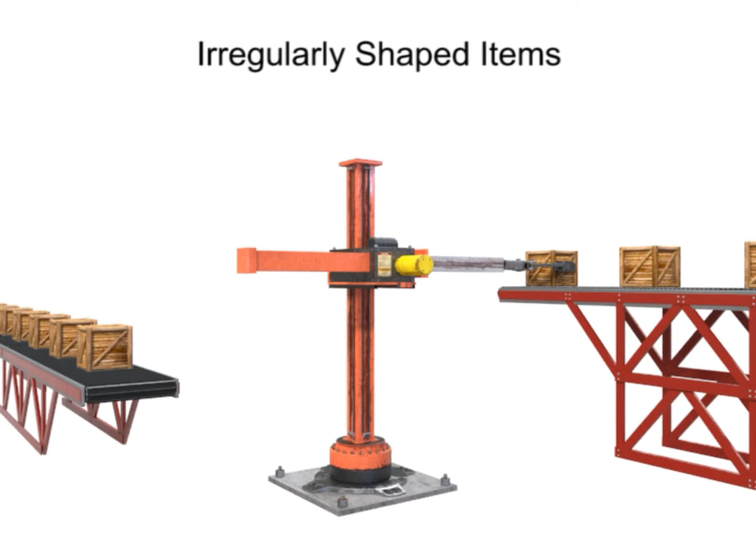There are various ways of lifting irregularly shaped items. While the most common lifting devices in robotic arms are flat-surfaced grippers, these types of devices are most efficient with flat-surfaced workpieces and are not nearly as efficient with round, cylindrical, or other irregularly shaped items.

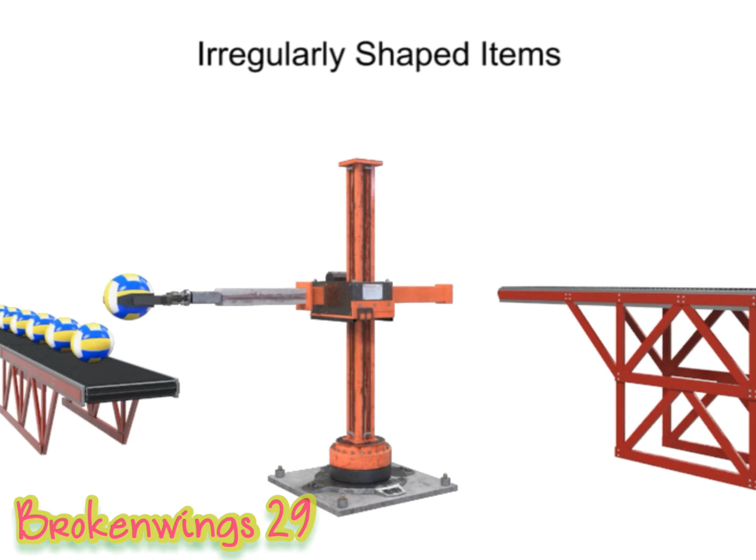When used inappropriately, flat-surfaced grippers can either crush the workpiece or drop a workpiece due to inefficient grip, especially in high-speed operations.

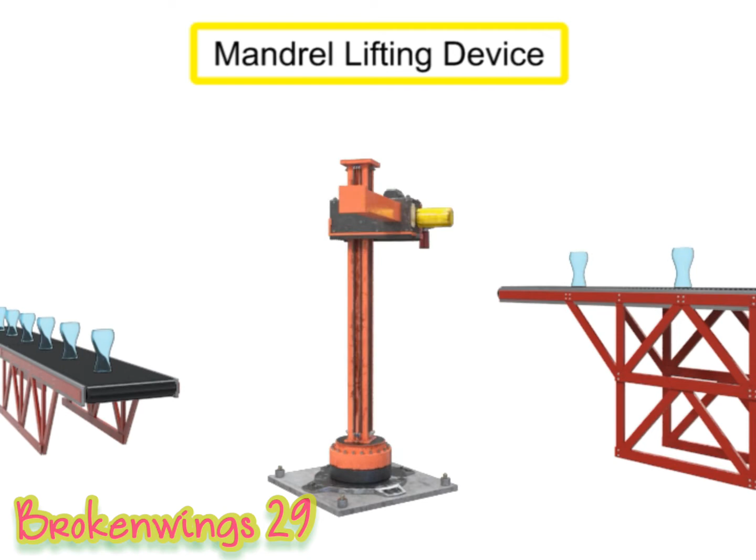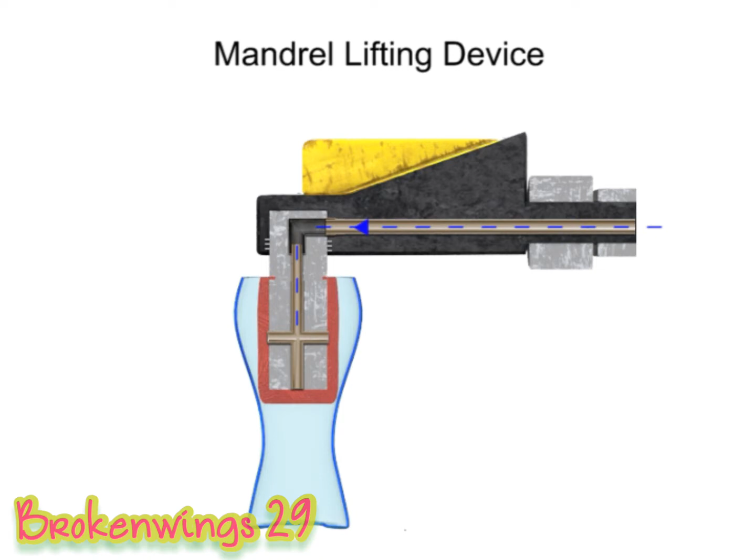A pneumatic mandrel lifting device is used to lift objects that are hollow. The gripping action of a mandrel lift is applied to the interior of the workpiece. Low-pressure air is channeled to a chamber behind a diaphragm. The diaphragm then expands until it is firmly gripping the interior of the workpiece. To free the workpiece, the air is released from the diaphragm, which then deflates, allowing the robot to relinquish the item.

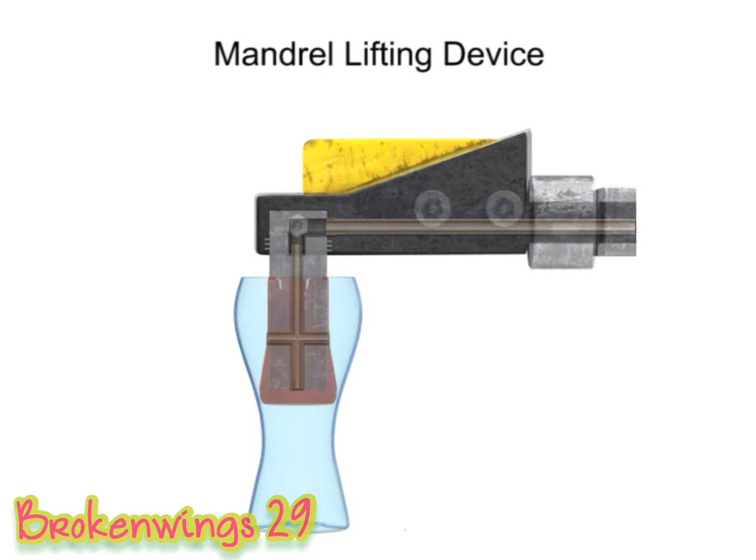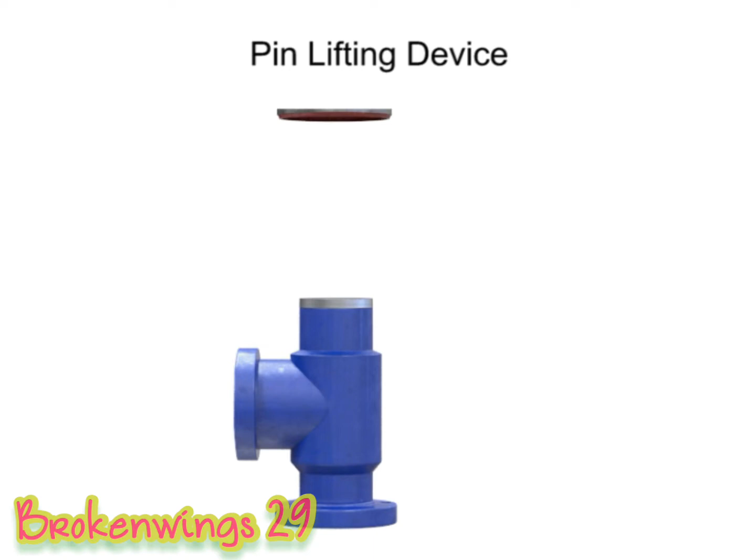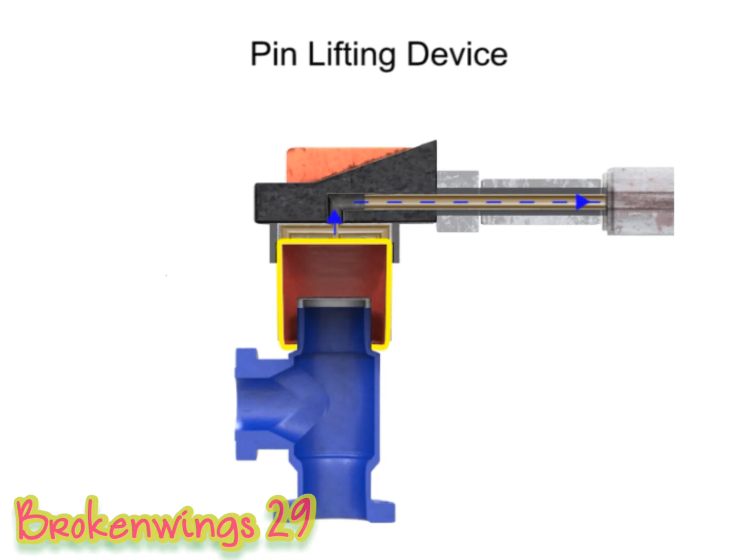Pneumatic pin lifting devices work similarly to mandrel lifting devices. The main difference is the location of the gripping action of the tool. With a pin lifting device, the gripping action occurs on the outside of the part. As the tool surrounds the workpiece, low-pressure compressed air is used to expand the diaphragm, ensuring a snug grip on the exterior of the workpiece. To free the workpiece, the pressurized air is released, which deflates the diaphragm and allows the workpiece to drop freely.

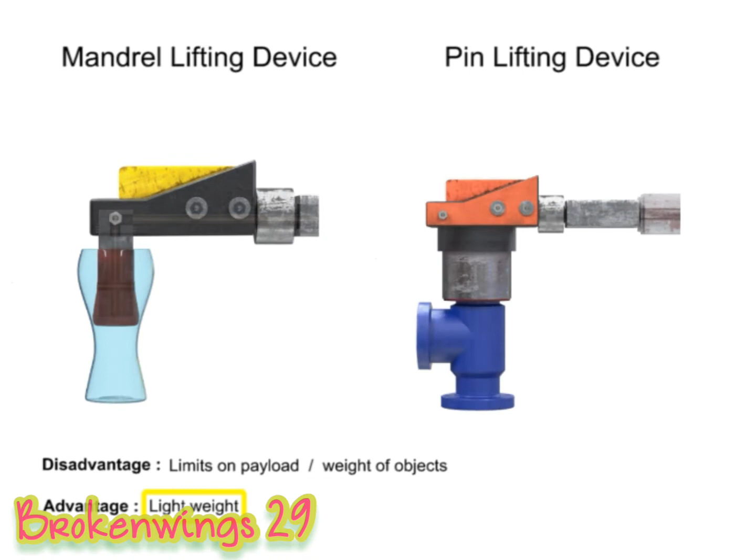The single disadvantage of these pneumatic lifting devices are the limits on the payload or weight which they can lift. However, these flexible pneumatic devices have many advantages, including their light weight, their ability to grip parts without damaging surfaces, and their ability to grip parts with irregular shapes.

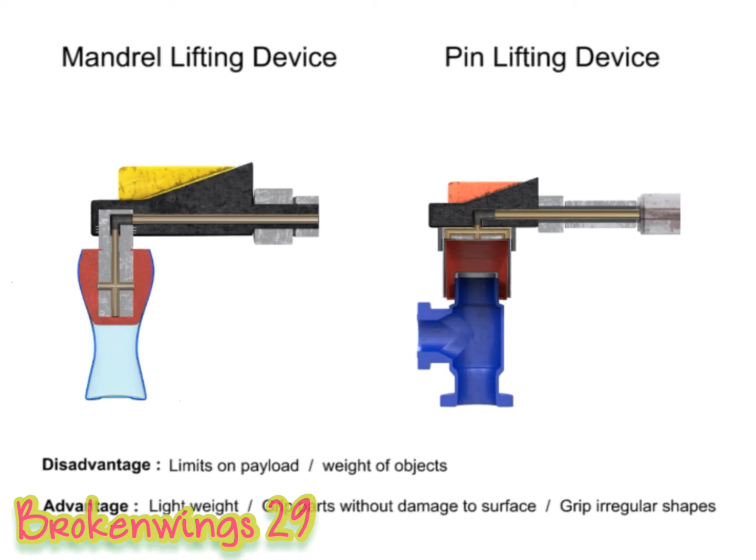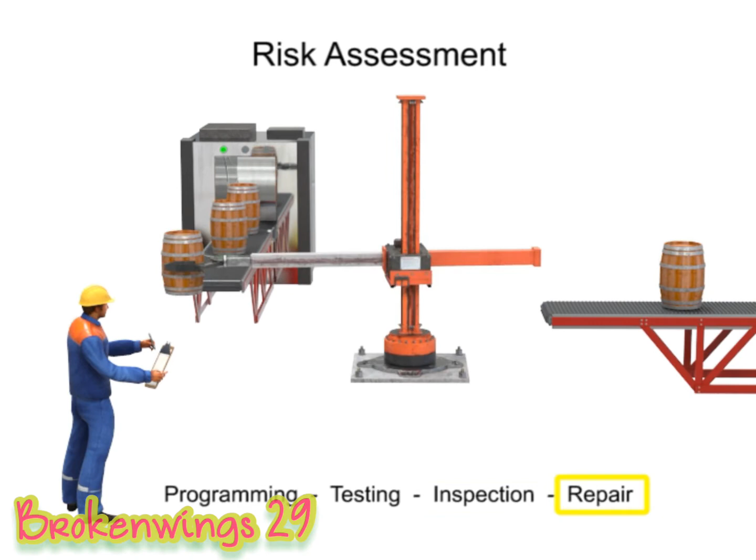The first step in the design process for any robot is a risk assessment of its potential hazards. Studies have shown that most injuries occur not during normal operation, but during times when human interaction is most prevalent: programming, testing, inspection, and repair. By system design, robots rarely need human interaction during normal use and operation, but when programming, testing, inspection, or repair is required, humans are more likely to be in the robot's work area or work envelope.

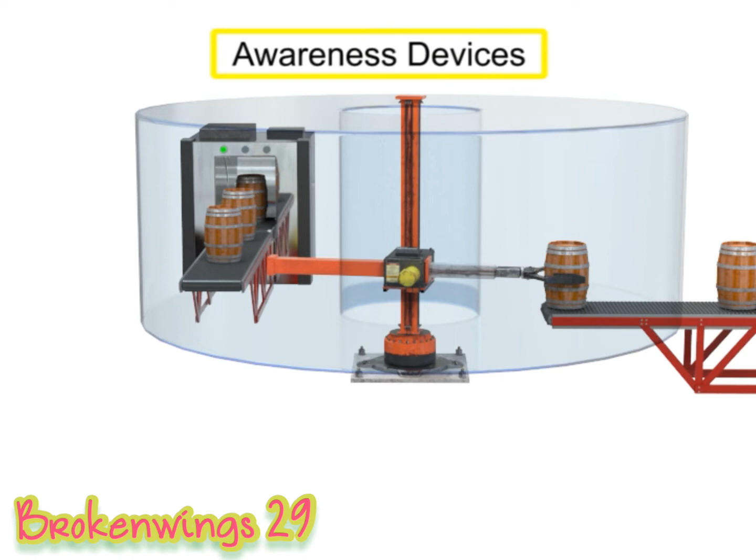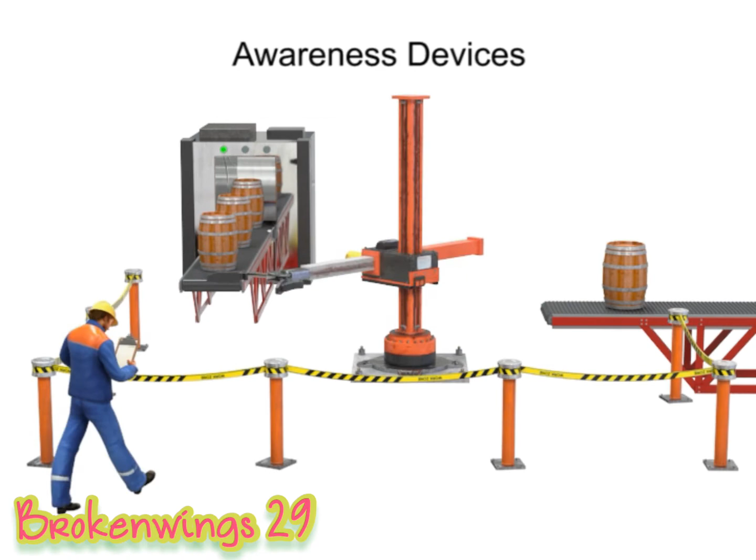Unauthorized access to the robot's work envelope can be hazardous to personnel. Several methods can be used to protect the work envelope. The simplest are known as awareness devices. These devices are only intended to define the work envelope and make personnel aware of the hazards. They do not prevent access and usually consist of small fences or roped-off areas.

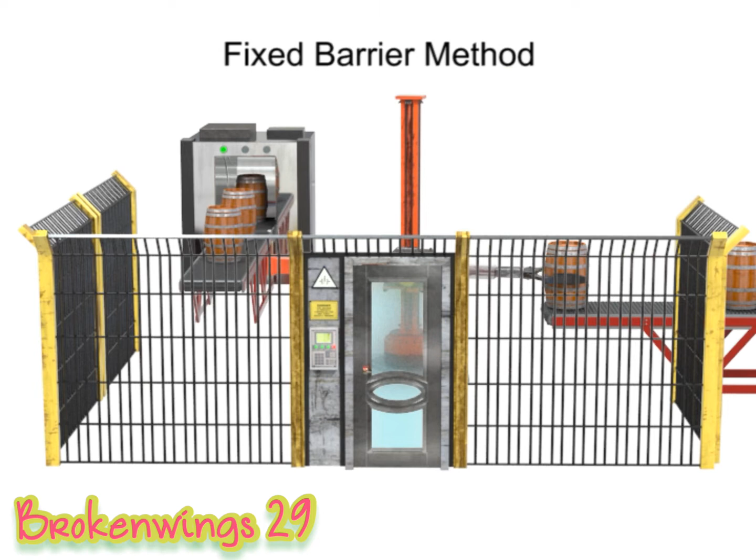Guarding methods are used to prevent unauthorized access to the work envelope. The simplest is known as the fixed barrier method, such as a fence or wall. The physical barrier is put around the work area and is configured in such a way that prevents access through, over, or around without a special key or access code.

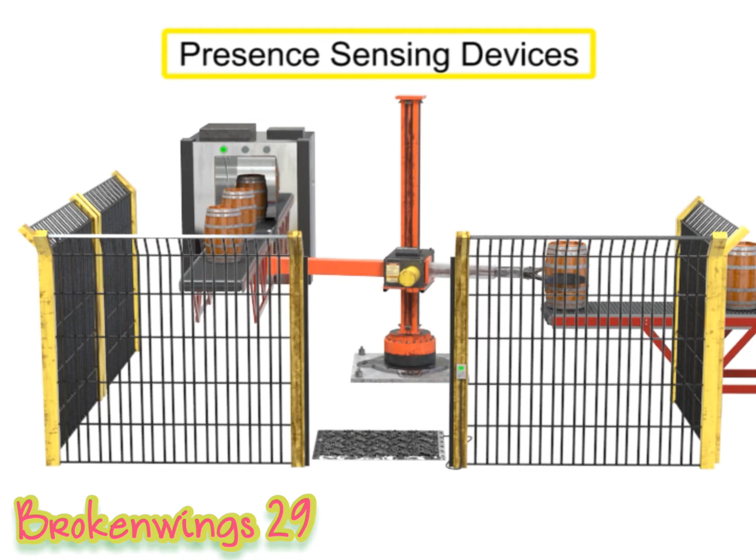Another method of protecting the robot's work envelope employs the use of presence-sensing devices. These devices detect the entry of a person into a hazardous area and slow or stop the robot. Pressure mats are typically installed just outside the robot's work envelope. When a person steps on the mat, a signal is sent to the robot to stop or slow work.

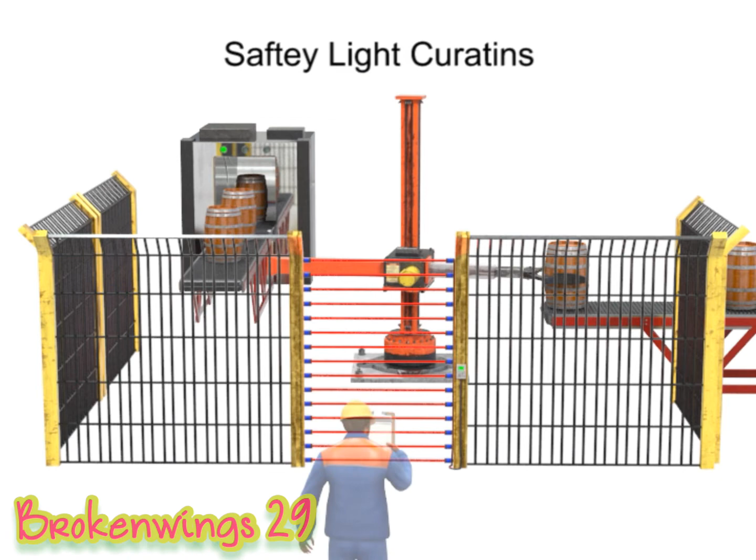Safety light curtains are another type of presence sensing device. When a person enters the work envelope, the light beam is interrupted, which sends a signal to the robot. For certain work scenarios, sudden stops could cause the work to become uncontained. Objects may continue to move even after the robot stops.

In these cases, emergency braking of the robot is used in lieu of completely stopping. With emergency braking, the robot slows down work and does not stop suddenly.

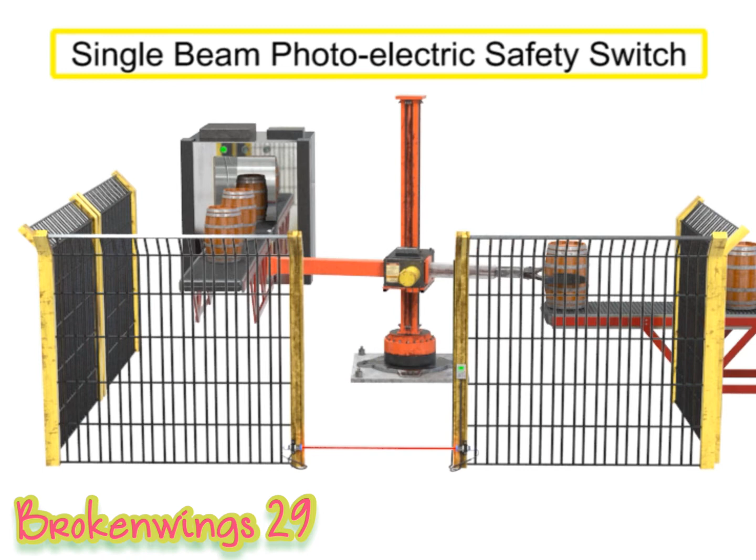Another type of light barrier is called a single-beam photoelectric safety switch. These work in the same way as a light curtain but have only one beam of light, similar to an automatic garage door sensor. Single beams can be useful for preventing unplanned or surprise access to the work area. However, depending on their placement, single beam lights may not stop a determined person from gaining unauthorized access and potentially causing damage to the robot or personnel.

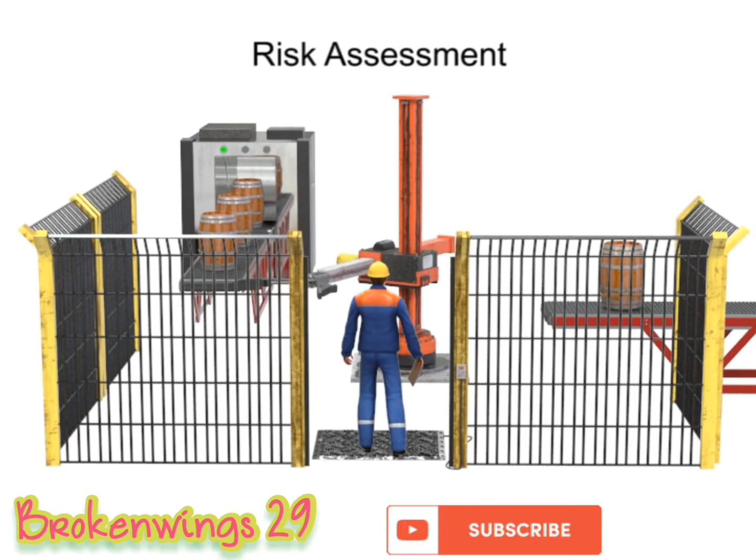The design and location of control panels are also fundamental to a safe robotic design. The control panel should always be located outside of the work envelope but within sight of the robot. Emergency stops should be located in all zones where needed and should be a large part of emergency personnel training. If the proper safety measures are used, robots can be a highly efficient, safe way to accomplish work.

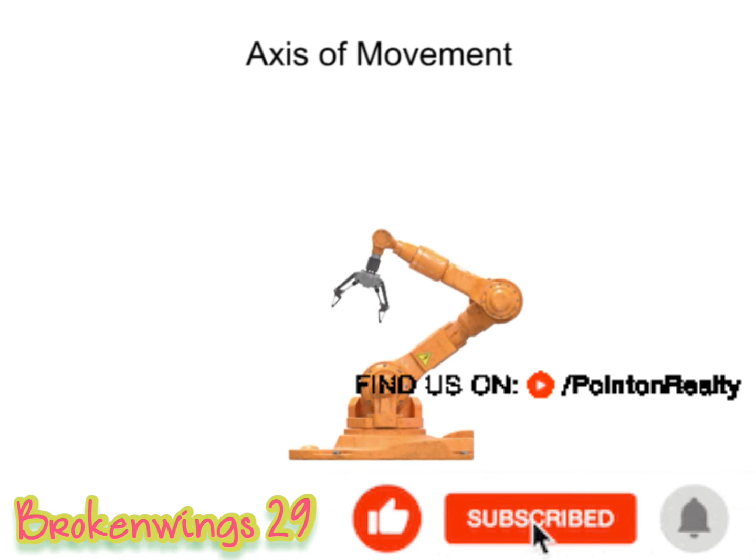Robots come in all different shapes and sizes, but are frequently classed by their degrees of freedom. Each direction of movement on the robot is considered an axis of movement. This robot rotates at the waist, bends forward and back at the shoulder, and moves vertically at the elbow.

Each single movement axis is equal to 1 degree of freedom. This particular robot is equal to 6 degrees of freedom. It moves along one axis for each of the waist, shoulder, and elbow joints and along 3 axes at the wrist using pitch, roll, and yaw.

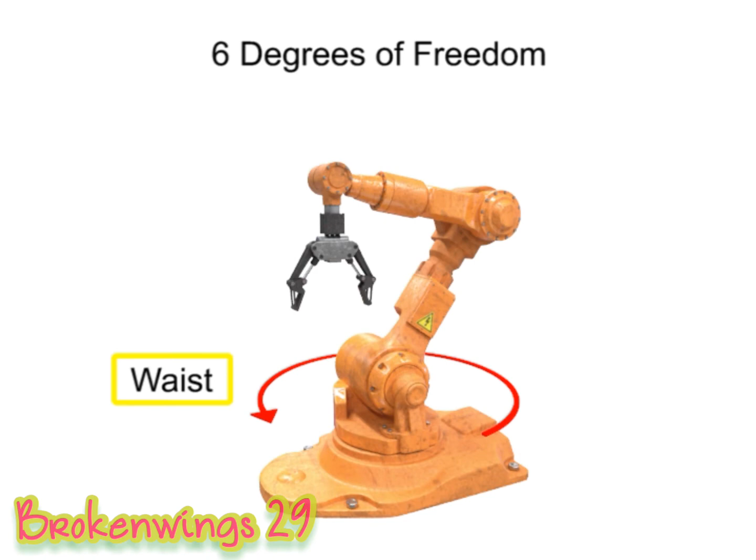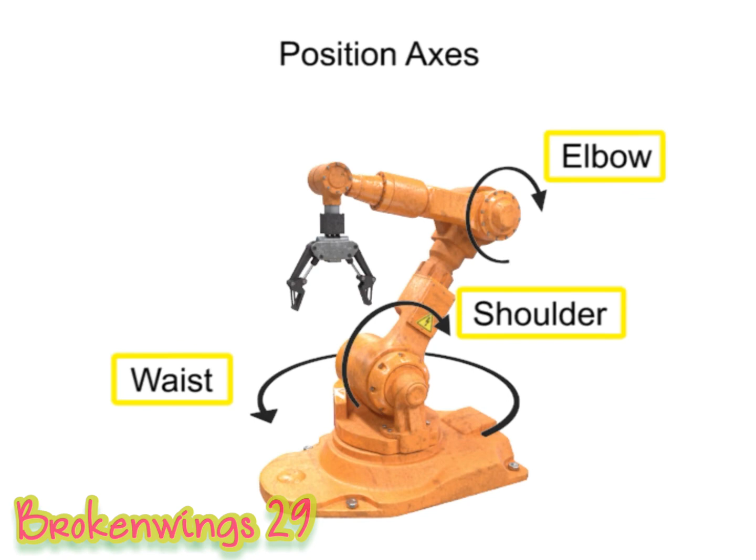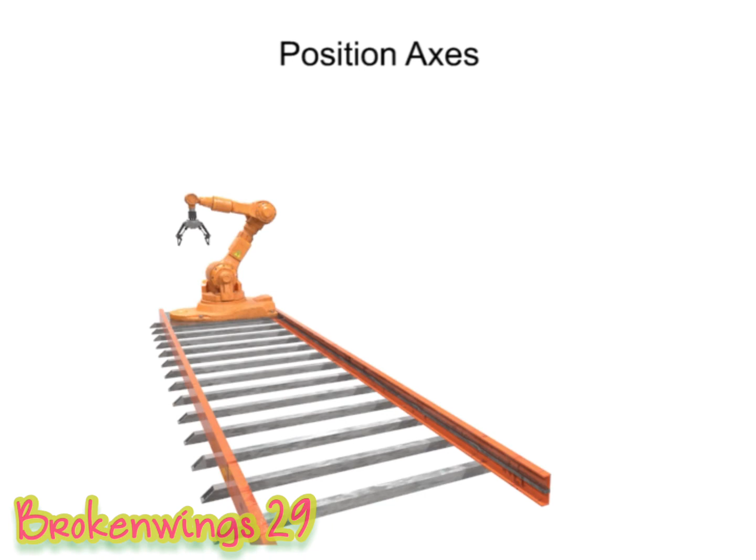These particular motions help to locate the tool in the work area and are called position axes. Most robots have at least 3 position axes to help position the tool in the work area. If the robot were to slide along a track, it would have a 4th position axis of linear movement and another degree of freedom.

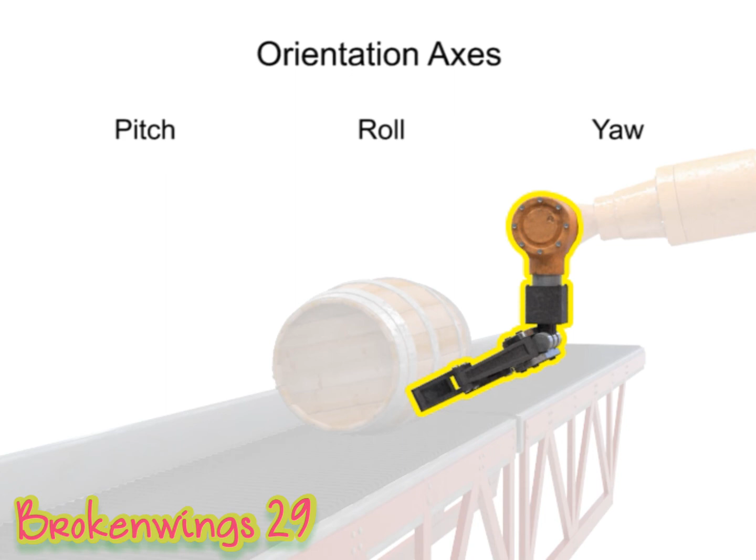While the position axes locate the tool in the work area, the orientation axes help orient the tool in relation to the workpiece. The types of movement along orientation axes are defined as pitch, roll, and yaw. These movements all occur from the same joint, the wrist, but along 3 distinct axes. This type of movement is most easily illustrated as it relates to aircraft movement.

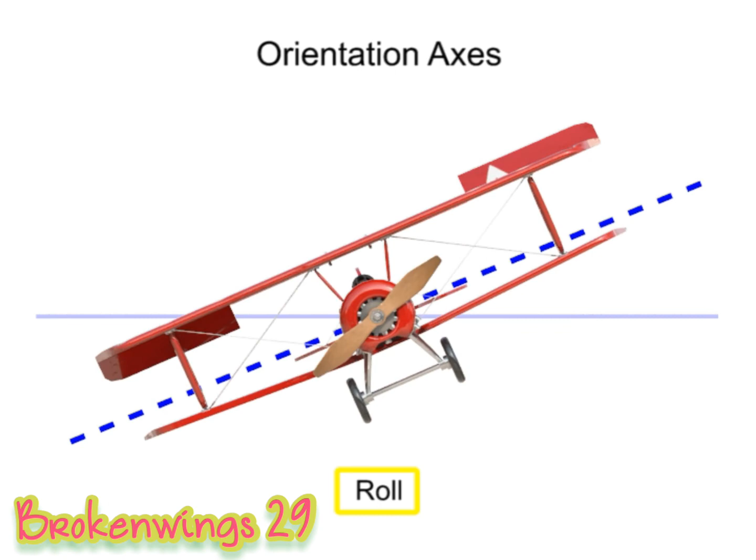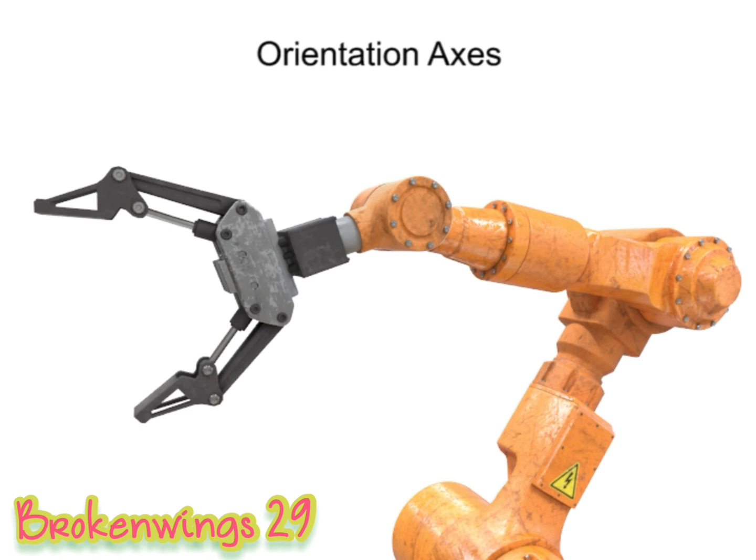The robot's tool moves in the same way. Pitch moves the tool vertically. Roll rotates the tool about its center axis. Yaw turns the tool left and right.